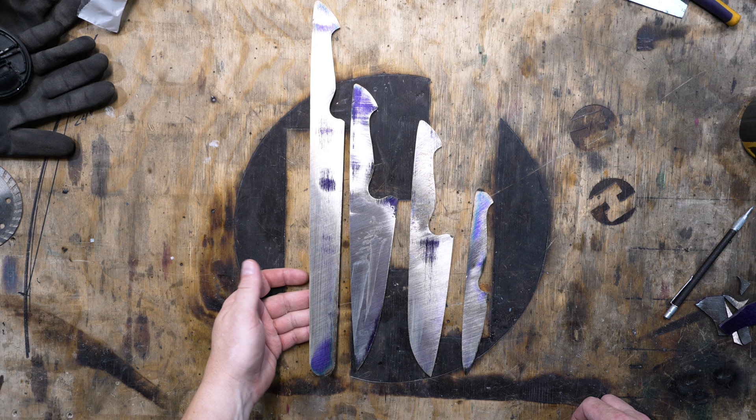So, next step is to clean these up a little bit and drill some holes and start the heat treat process. So this video is going to be mostly about the heat treating of the 1084 15N20 Damascus. Now, there's lots of ways to do this. If you look online, it could be a little overwhelming because everybody's got a different temperature they heat treat at. Everybody's got a different normalization process.

What I do, because I know where I got the steel and they have their own normalization process and hardening process, I just go off of their directions. This is New Jersey Steel Baron 1084 and 15N20, so I'm going to heat treat as though the whole thing's just 1084.

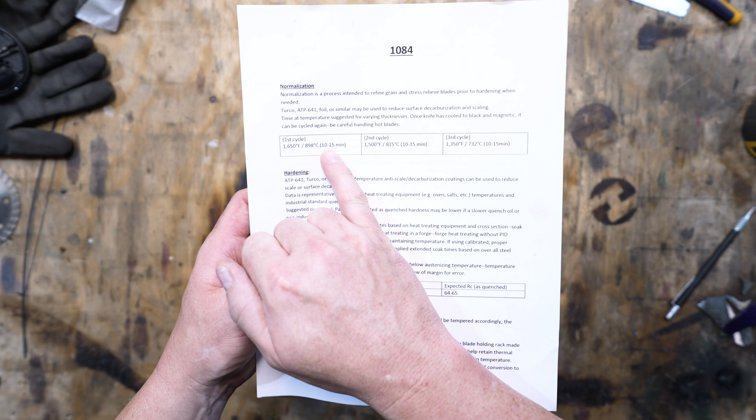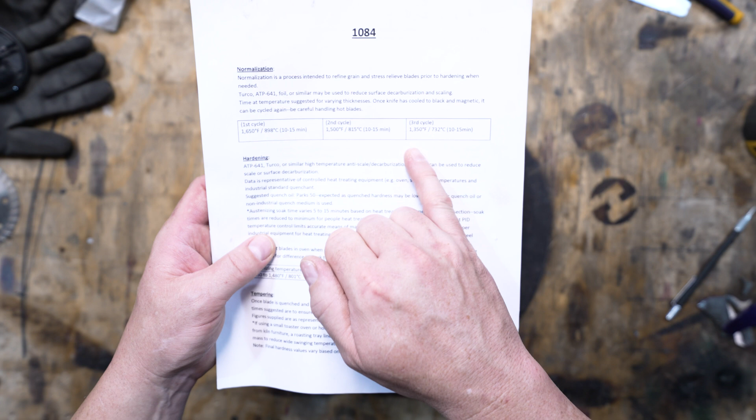So on here you can see they've got a normalization temperature and a length, a soak cycle. So the first cycle 1650 for 10 to 15 minutes, second cycle 1500 for 10 to 15 minutes, and the third cycle is 1350 for 10 to 15 minutes. So that's what I do.

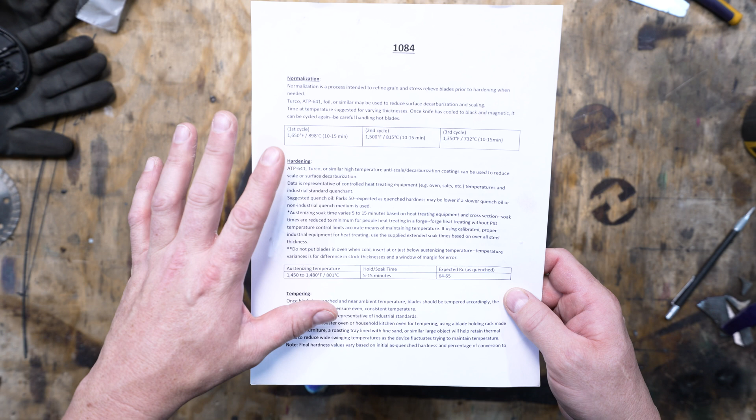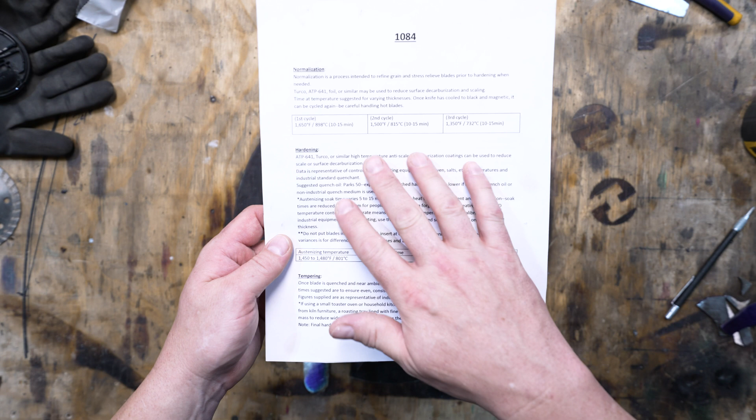When I got my kiln, it actually had some presets for 1084 or 1085 it says, and their temperatures are different. So I just err on the side of caution, and to determine which heat treat process is best out of all the things you can read online, I just go with the manufacturer's recommendations.

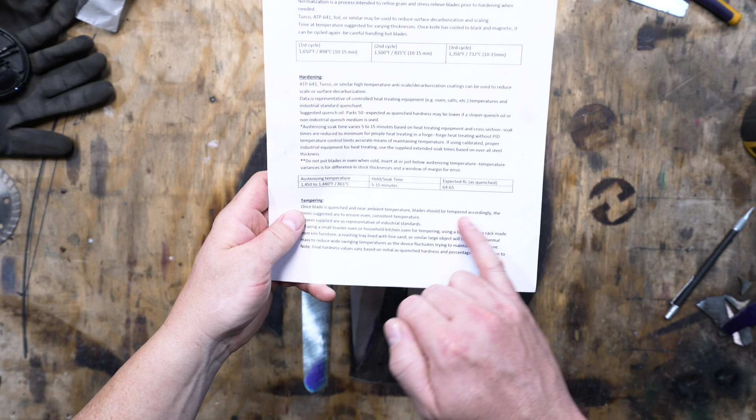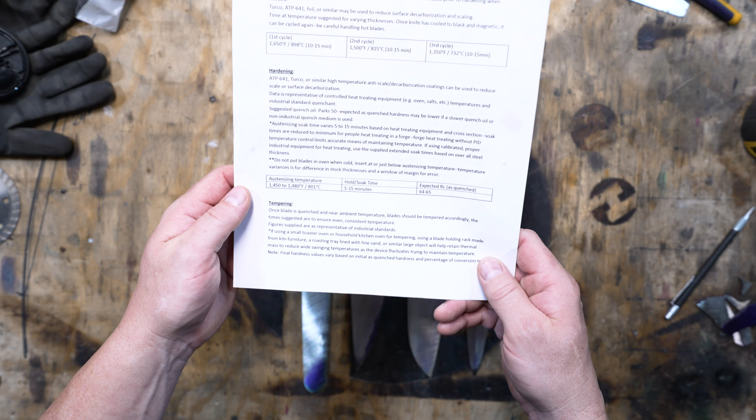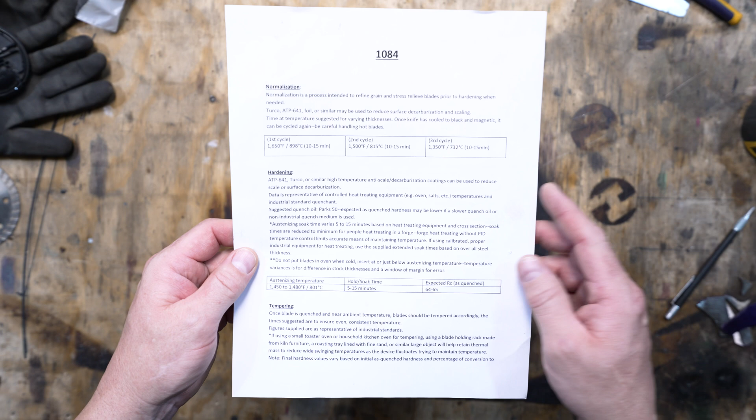And then down here they've got the hardening temperatures, 1450 to 1480, 5 to 15 minute soak, and it'll tell you what your expected Rockwell hardness is going to be. And then it also has directions for the soak time and just different things to read through, tempering, all that stuff. So on the New Jersey Steel Baron site, you can get this. It's just a download, and I printed it out, so I've always got it out here. But I just go by these directions.

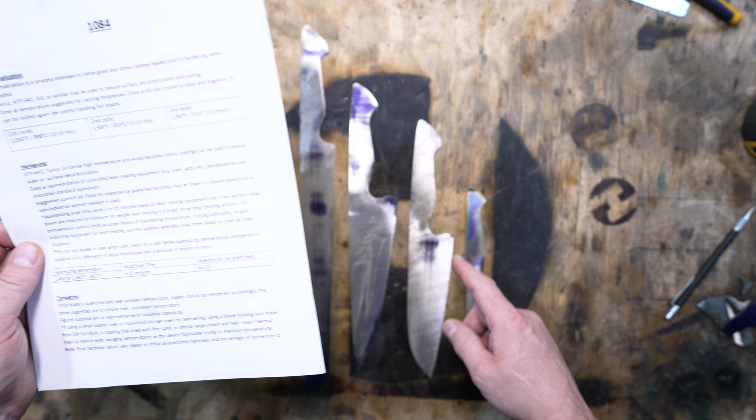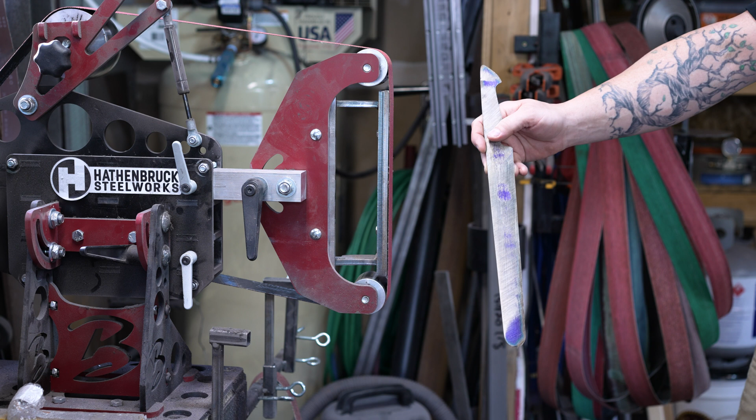So I'm going to get on the grinder and start cleaning these up a bit and rough in some bevels and then drill the holes, and we'll get to the heat treating. I'm going to have my mask on, so I'm going to do all the talking really quick. So I've got 80 grit. Essentially what I'm doing is I'm just going to get all these 80 grit marks out from the surface grinding, and when I do that, I grind at an angle.

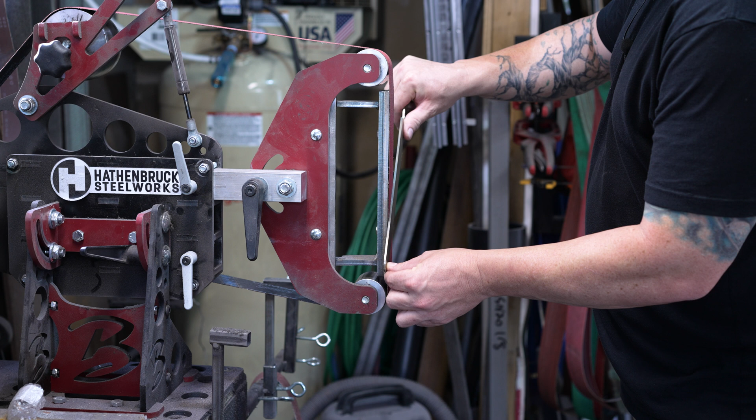This does two things. It gives me an effective, larger length of a platen. So for instance, 2 inches this way, but if I angle it like this, I've got almost a 3-inch platen. So it's easier to get a nice straight line when you angle. And then the other reason is my angle marks will be different than the marks going this way, so I can tell when I've got them all out.

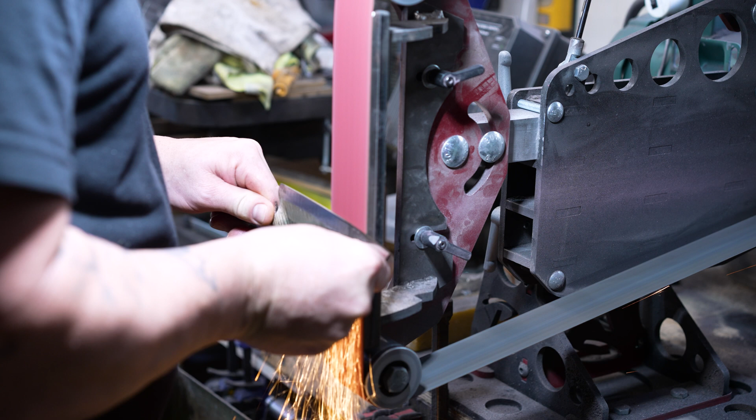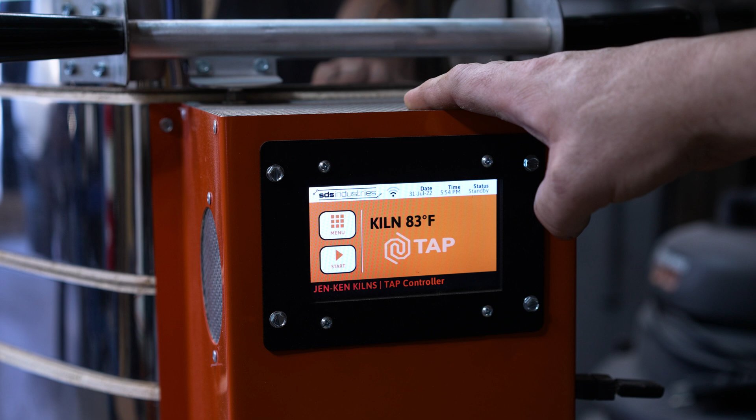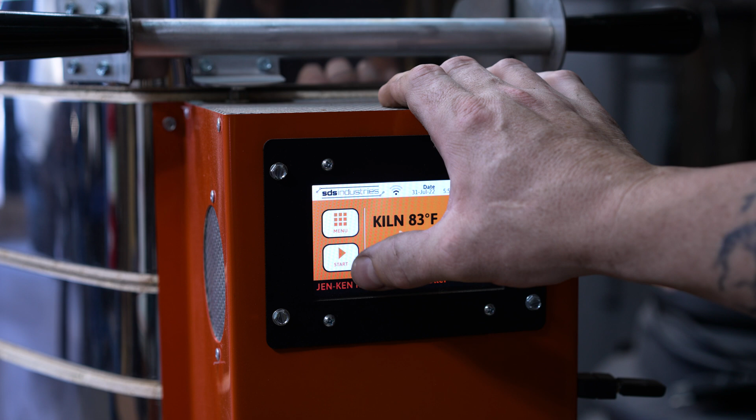So let's get the kiln going. So our first heat is going to be our first normalizing heat. Since this material has gone through a lot of change, we want to reset the structure inside of the steel, the grain structure. So we're going to normalize.

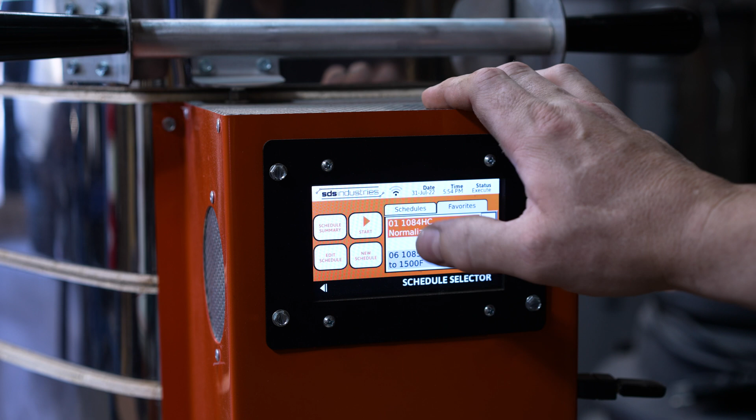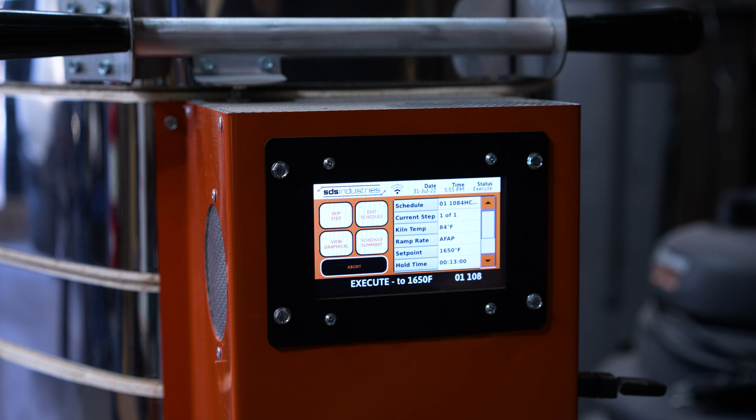Go to my favorites here and look for my 1084 cycle. There it is, 1084 1650 is going to be the first cycle. So we're going to start this up with no delay, and we just have to wait for this to heat up to about 1500 or so, and then we'll pop the blades in there, let it get up to 1650, and then we'll soak them about 5-10 minutes and then let them cool down to black.

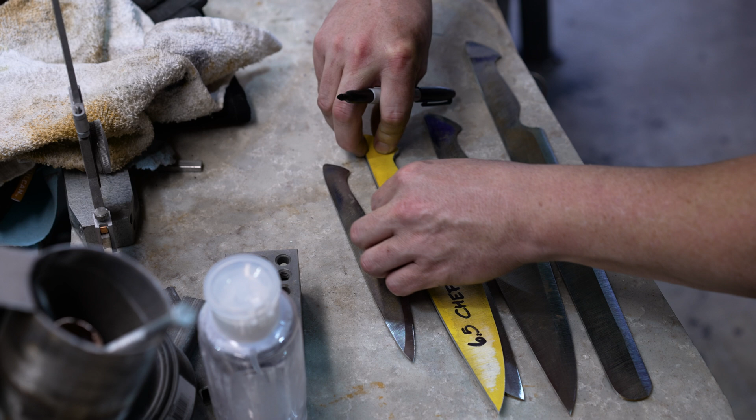All right, we got to put some holes in these tangs before we start the heat treat. So I'm going to use my template here, and then make a little mark right in the middle. And again, I'm using the template because this is a set and I want all these handles to look very similar, if not exact. And I'll put a little punch in all these to give the drill bit a place to start.

Give these guys a little chamfer. Because my kiln is a vertical kiln, they hang, so I have to drill an extra little hole that's about 1/8 of an inch so I can put my pins in it to hang them.

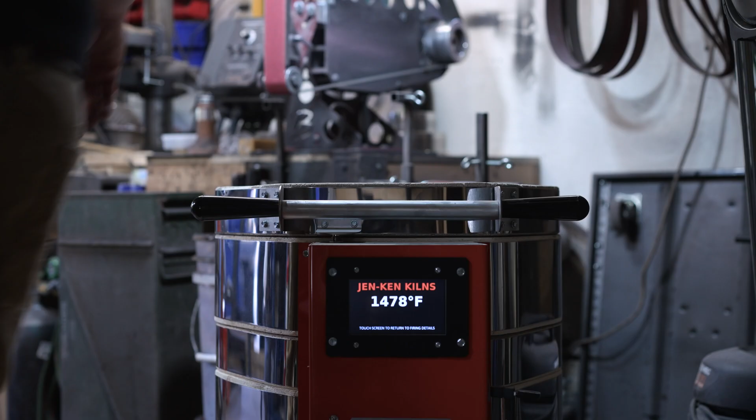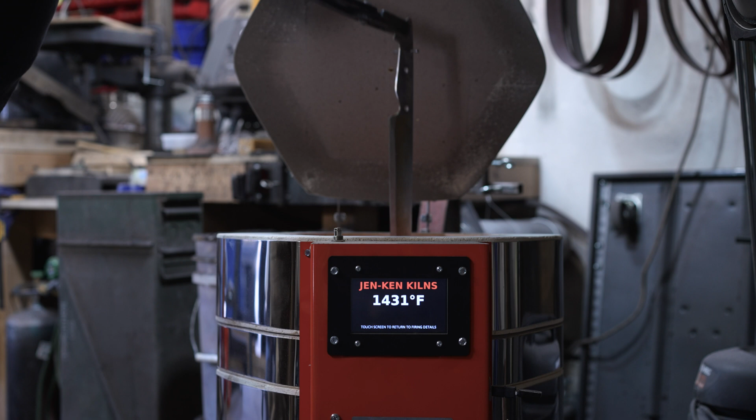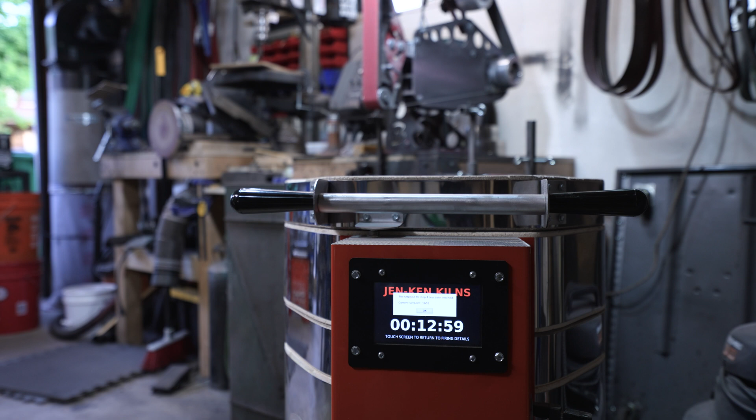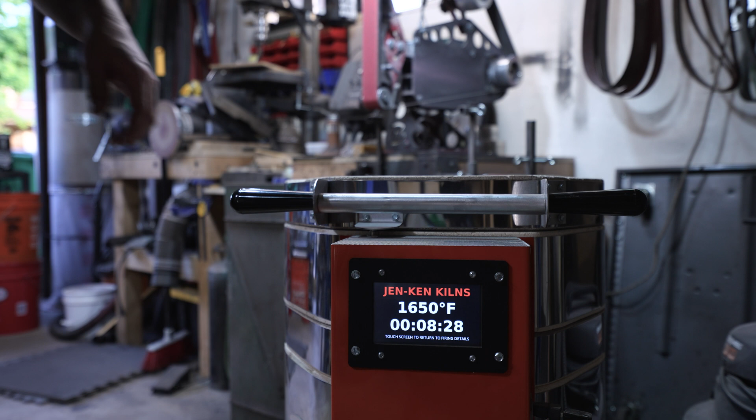All right, we're pretty close to 1500, so I'm just gonna pop these in here. And we'll let this guy heat up to 1650 so these can soak for just a bit, and then we'll hang them on the rack till they cool to black. And 1650. Turn that off. All right, let's get these out of here. Let this kiln cool back down so we can do the 1500 degree.

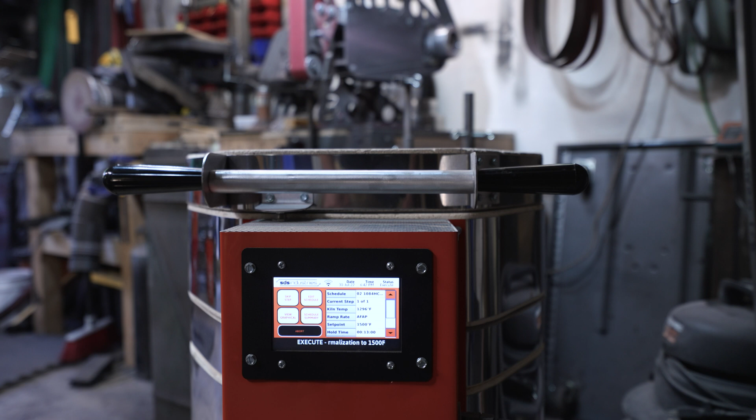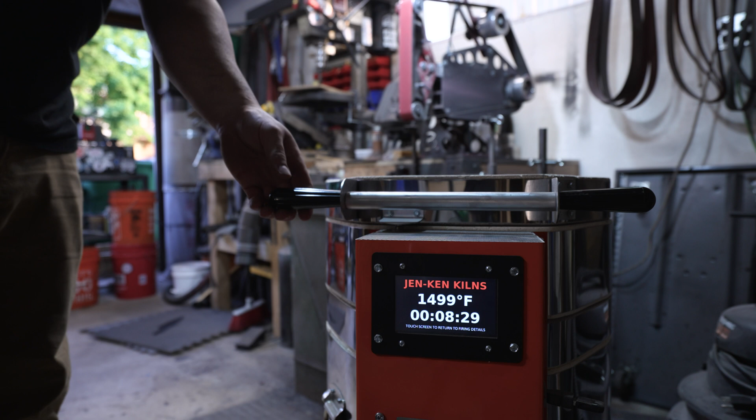All right, we're doing the next step, and this one is 1500 degrees. The blades cooled to black, so I slapped them back in here. We're at 1300 degrees right now, so a couple hundred more degrees soak, and then we'll let them cool again. All right, here we are, 1500. Let's get these on the rack. See if I can do this without dropping one this time.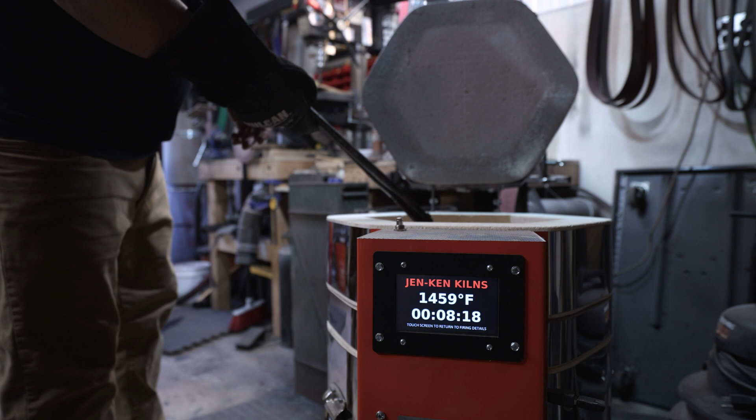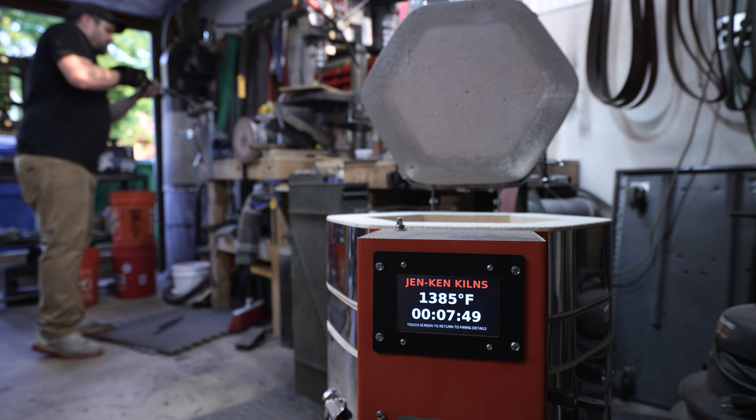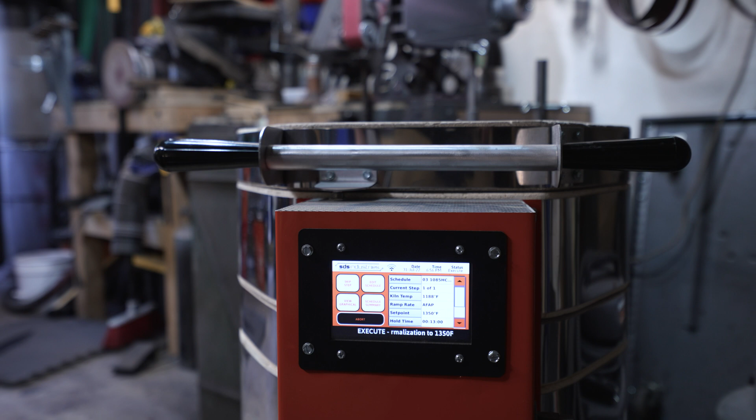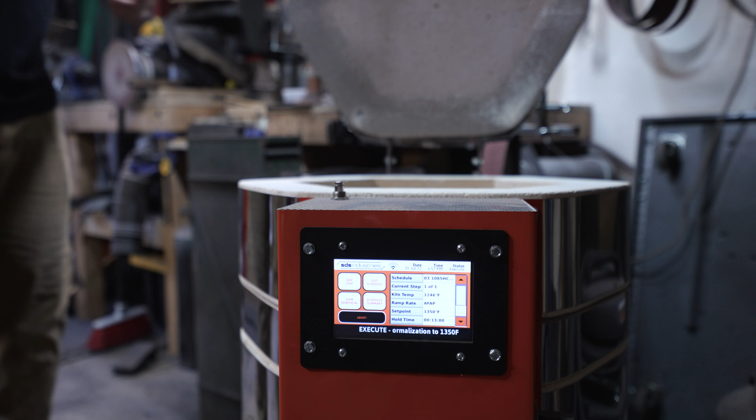Okay, let them cool to black. Let's get the 1350 cycle started. And these knives are at black, so we can put these in here as soon as we get close to 1350. All right, let's get these knives put back in here. There we go.

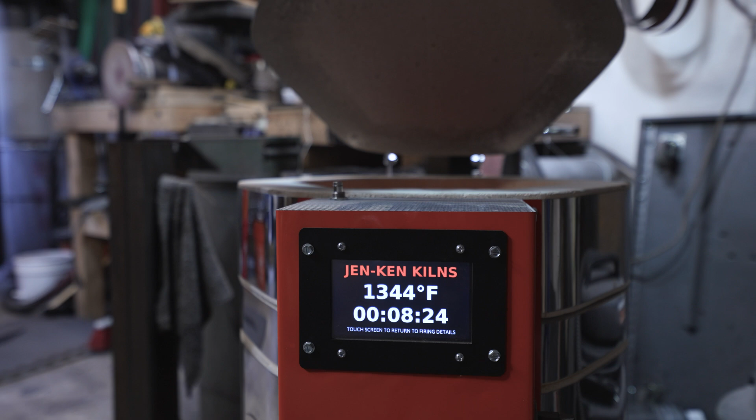Okay, over in the forge, I've got a piece of steel heating up so I can heat up my oil to about 120 degrees. And right now we should be able to pull these out and let them cool to black. This is the last normalizing cycle. So once these have cooled a little bit, we can start the hardening process.

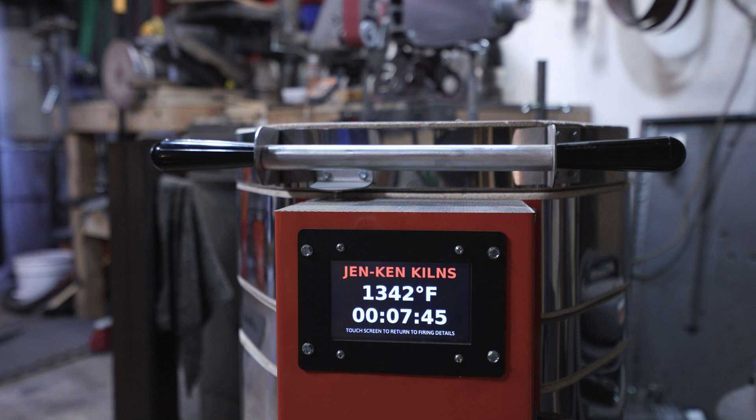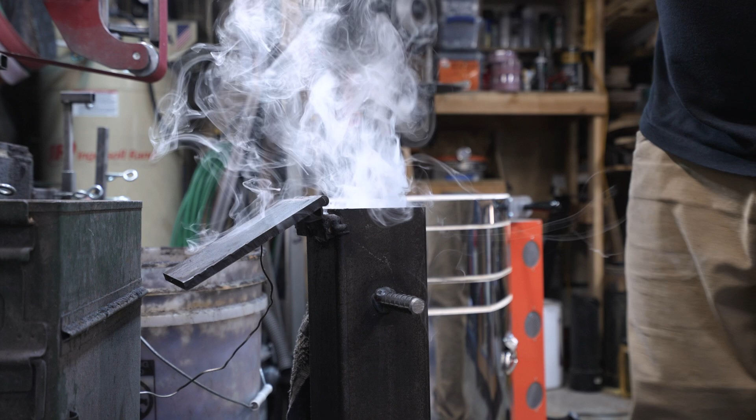All right. So I'm going to cancel this and let this thing start to cool just a little bit. Put this in the oil to heat it up a bit. I got a thermometer in there so I can keep track of the temperature. That took us up to about 130 degrees, which is going to be perfect.

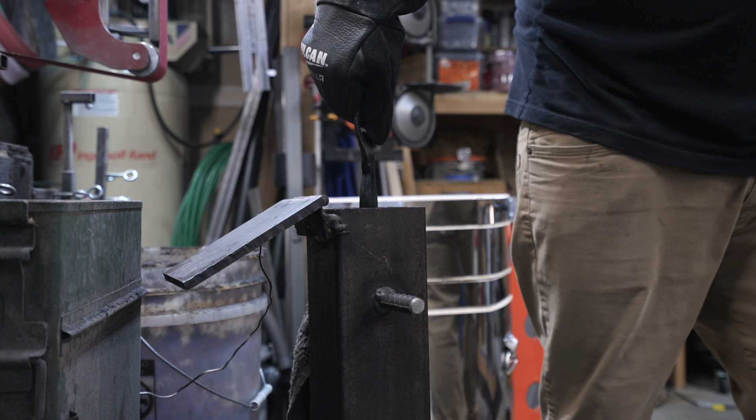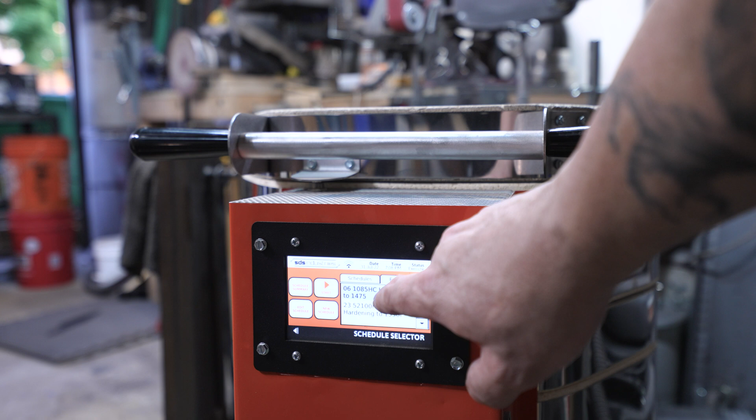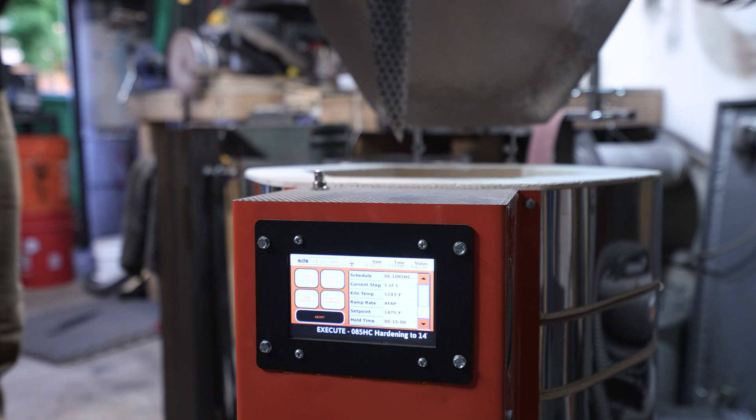Now let's get our hardening temperature ready to go. Let's see, 1084, 1475. That's what we're going to go with. So let's get that started. Our temp's at 1232, so we're just going to put these blades in here now. There's the paring knife and the brisket, chef knife, which still has a pattern from it falling on my floor mat. And then the Santoku.

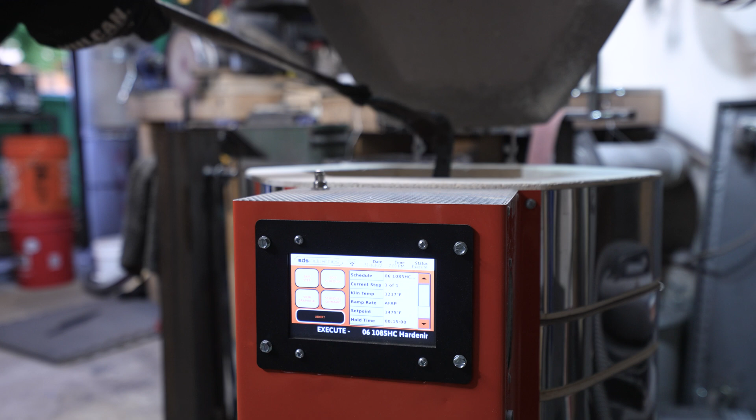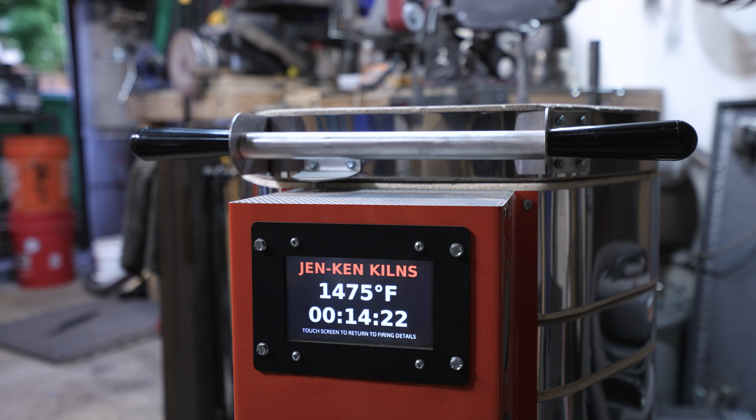Okay, so 1475, about a 10-minute soak, and then we'll dunk them in the oil. And here we are, ready for a soak. 5 or 10 minutes is all it should take. 1084 is very forgiving when it comes to soaking, because this stuff, really, you don't need to soak it. As soon as you're up to your temperature, it's pretty much good to go. Some steels do require a soak, so just make sure you're doing what the manufacturer recommends on your temperatures and soaks. Here goes knife number one. We'll start with the paring knife.

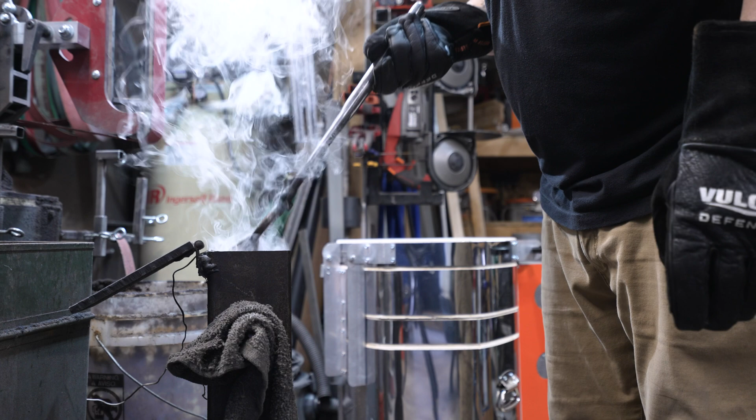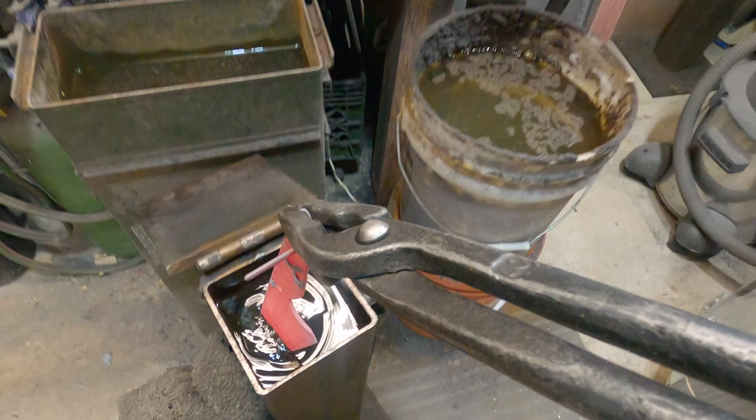And this one, I'm not too worried about bowing because it's pretty small, so we're good there. See that nice pattern in there. Here we go with knife number 2, which is going to be the chef knife. This one, I am concerned about bowing.

And it bowed a little bit. See if we can straighten that out a hair. Oops, a little too much there. All right, let's put that on the rack and see if it'll stay straight.

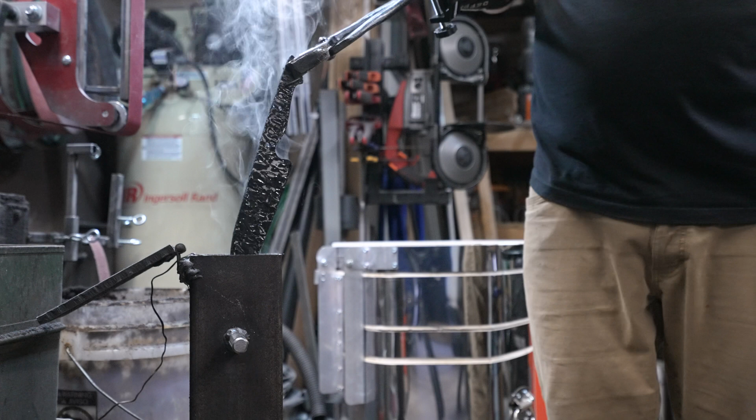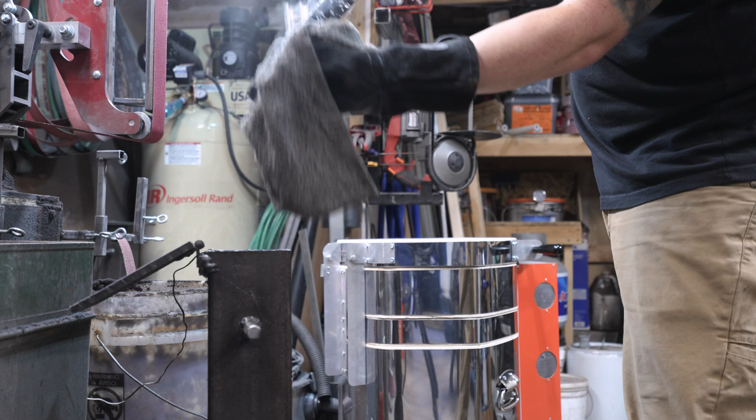And the last knife is the brisket, which I'm almost certain is going to warp, but fingers crossed. Let's see what we got here. That doesn't look too bad, actually. I thought there was going to be a lot more warp than that, but I think we kind of lucked out here. Just a little bit up front, a little bit right there, and oh, that is good now. So we'll let this hang and we'll check it periodically.

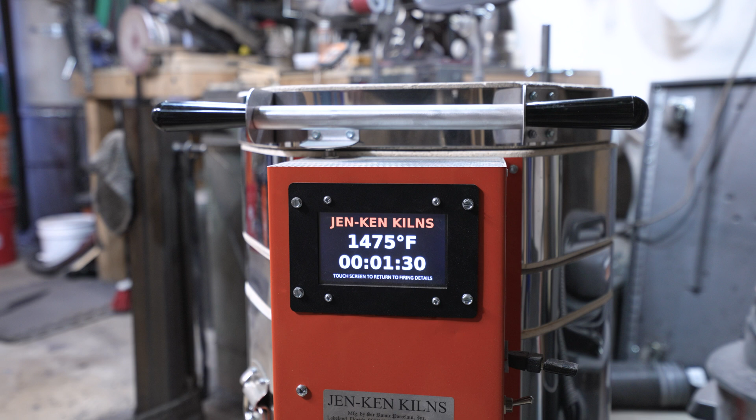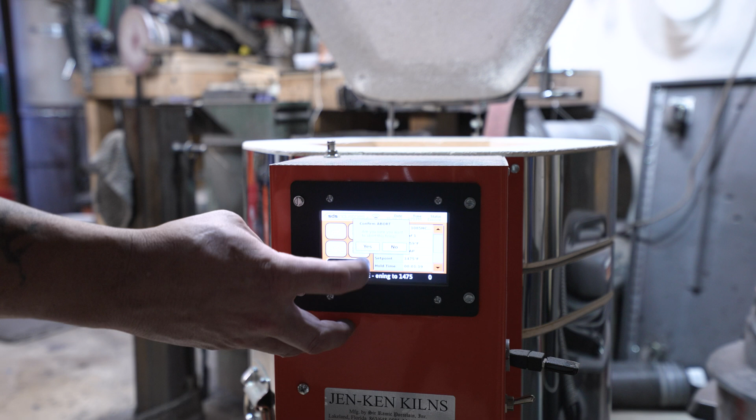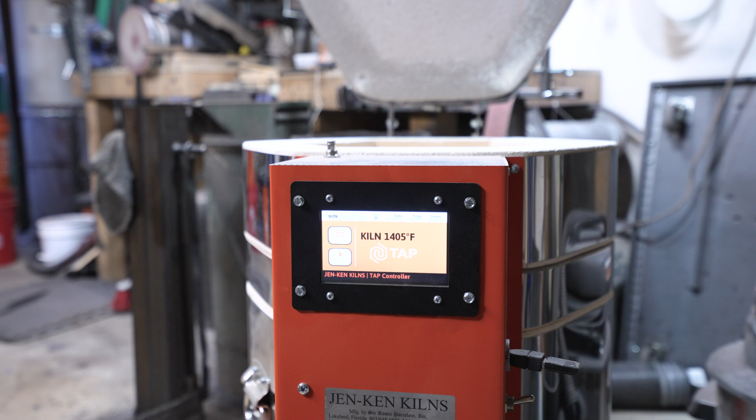And then back over at the kiln, I'm going to use this to do the tempering. This thing retains heat really well. So we need to open this up and cancel the cycle, and then just let the heat escape. It's probably going to take 30-45 minutes for this to get down cool enough to do the temper. So in the meantime, I'll watch these knives, make sure they don't warp while they're cooling. And then we'll come back here and slap them in this for the exciting part, the tempering.

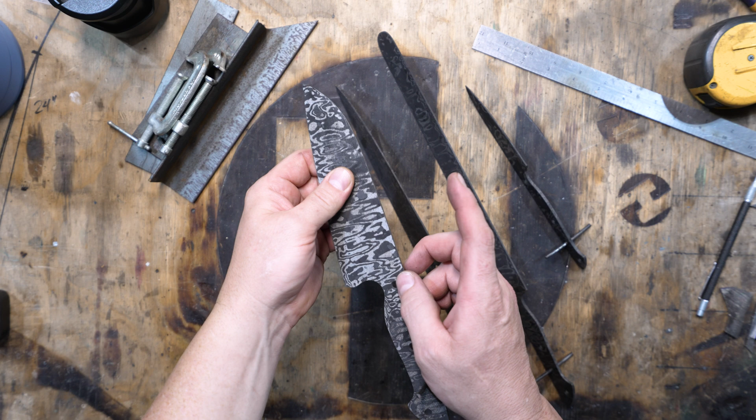While I'm waiting for my kiln to cool down, I'm going to show you what I intend to do. So the Santoku and the brisket knife both have a little bit of a warp right up toward the front here that I couldn't quite get out. And this one, it's not bad. I could probably get it out with the grinding, but I'll just get it out in the temper. So what I'll do is I'll run one cycle at 350 degrees to get these things softened up a little bit, and then I'll put these both in a little jig that I have.

And what I do is I put a piece of metal like this, and then I figure out where the warp starts, and then I'll clamp this down here, and then I'll put another clamp past where the warp is to pull the warp past straight to the other side, and that way when it tempers it'll pull that warp out either a little past straight or right at straight, and then the warp will be gone and grinding will be easier.

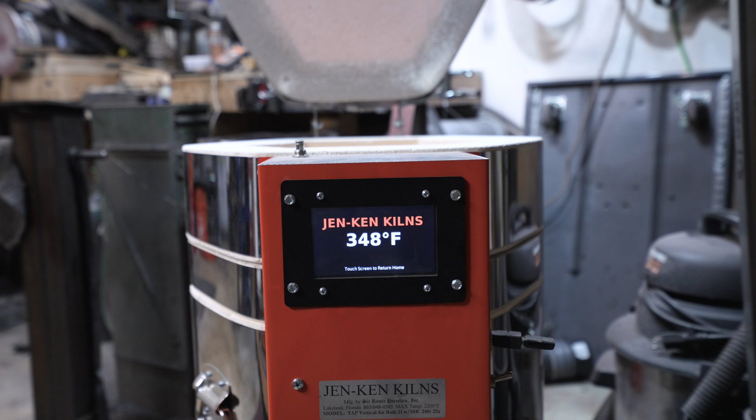So I'll put this on here, this one on this side, and then I'll clamp them both and then pull the warp to the opposite side on each of them. And most of the time that pulls the warp out, and then they end up perfectly straight. So this thing's cooled down to the point that we can probably start the temper cycle.

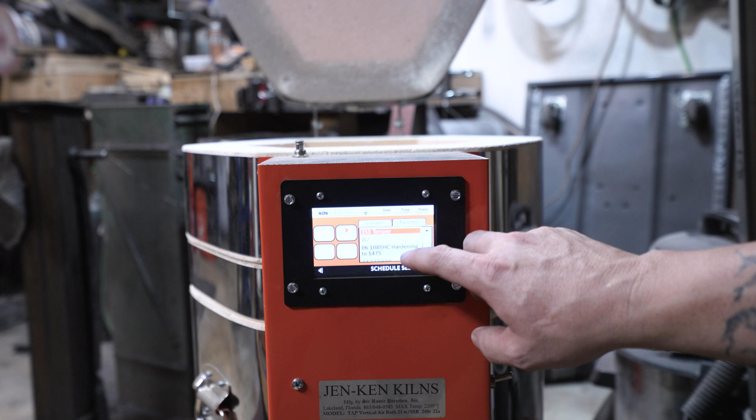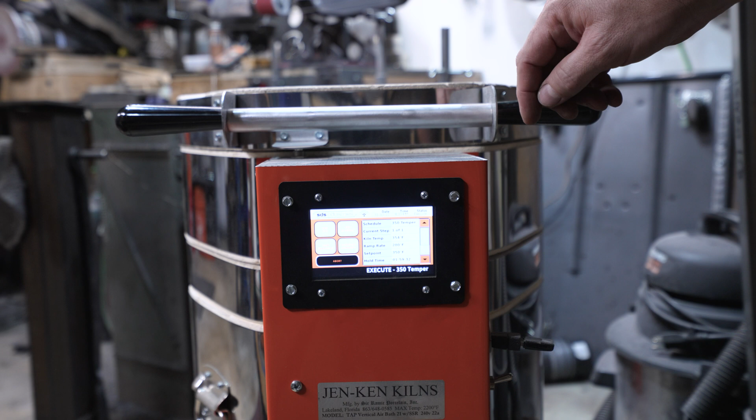So I have a few different temper schedules on here, and have this, where is it, 350 right here. So I have a 350 temper cycle, and what I like to do for the first little bit on this is kind of sit here and watch the temperature, because this is a schedule that I did, so my ramp speed and all that stuff should probably be adjusted to the point that it works a little better. But once the steel and the internal temperature of the kiln become equalized, then I can leave it alone.

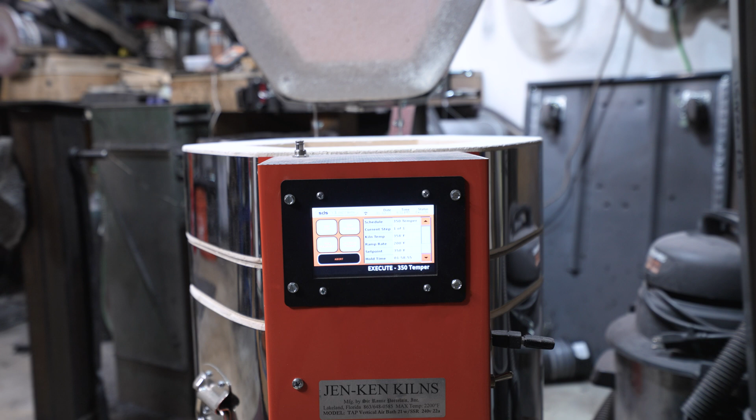But you can see right now that it's hopping up to 357 degrees. So I'll open this back up and let some of the heat out so it'll drop back down. So what I want to do is get it to where it sticks at about between 350 and 355, and then I can just let it go. I don't have to worry about it anymore. But most likely I just haven't set the schedule up correctly. The ramp speed's probably off something, but I'll get it figured out in the future. But for now, I just kind of watch this for the first little bit until everything equalizes.

The first temper cycle is done. Now I need to address the warps in these two knives, and they're really straight except for right up here toward the front, and they have like a nice little bow in them, just a little too much to grind out. So what I do is I'm going to take this, so this one's bowing this direction, so I'm going to lay this on a flat surface and look at it from the side, and wherever I see this start to lift up off of the flat surface, I'm going to mark it. That way I know to put the mark even with my piece that's going to raise it up, so I can bow this in.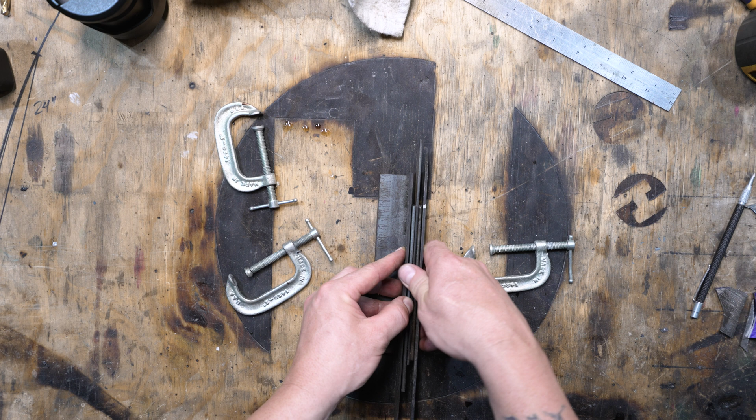So this one starts bowing right here at this mark, and this one starts bowing right here at this mark. So I'm going to take my piece of angle iron right here, and I'm going to put this right here even with this mark. And then what I want to do is place it on this piece of angle iron like so. And when you do two of these, it gets a little tricky. So I kind of want to put these in the same spot. And then this one's also bowing this way, so I want to actually put this about where it's going to be and then flip it this way, like that. Now, I just need to lock these down in place.

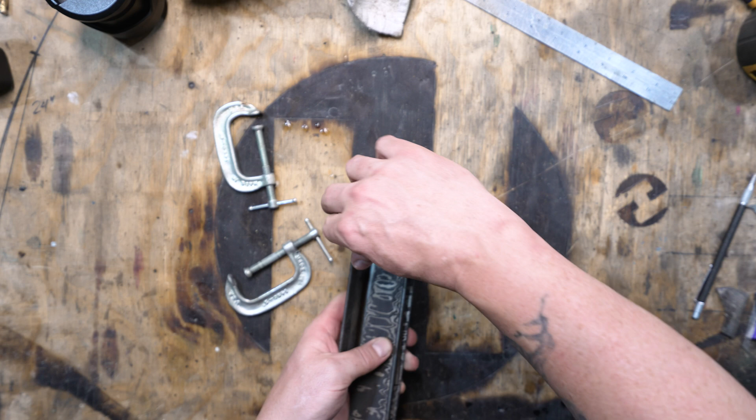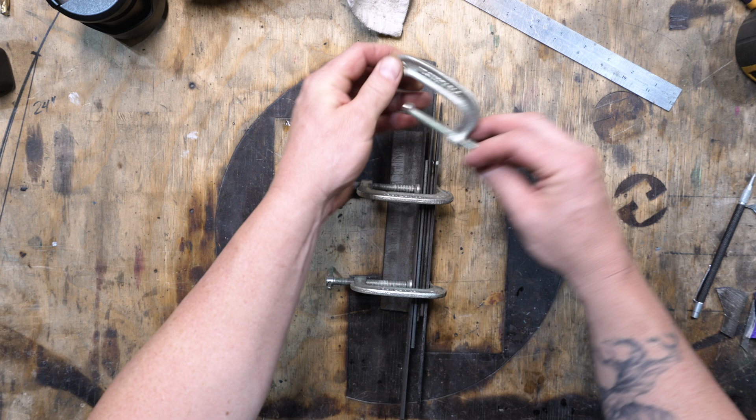Like this. And then clamp another one up here, just so I can keep these flat. So they're going to be flat up until here, and then they kind of bow out like that. So then when I get up to here, I just pop another one of these up here like this, kind of go toward the center of the blade, and then just crank this down until these bow this way past center. And if you leave enough space in between here to look down, you can see when those are bowing enough past.

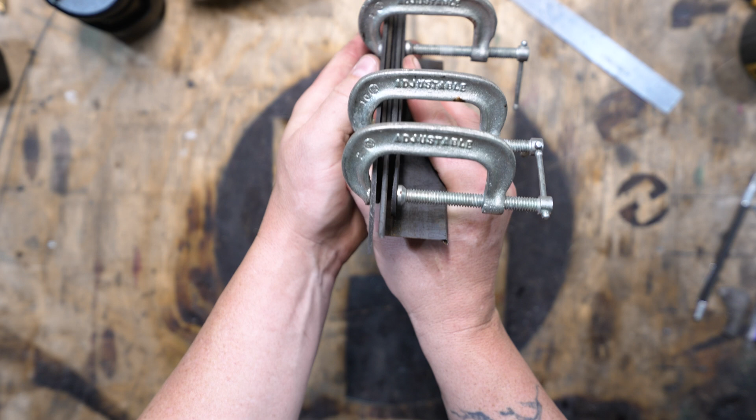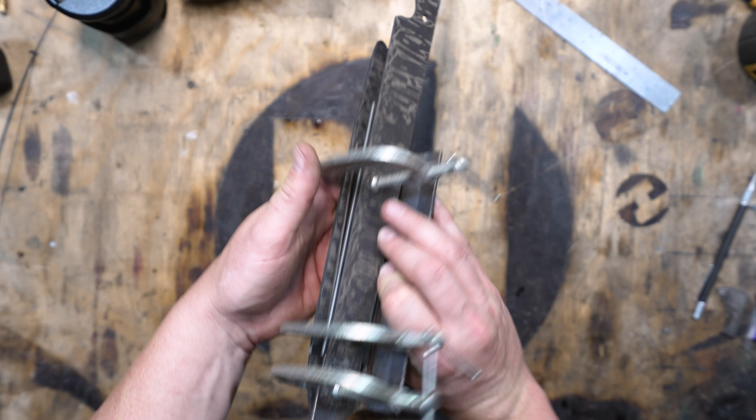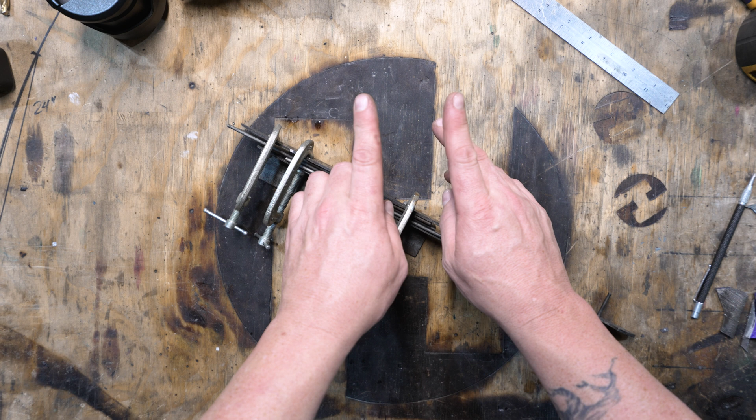So yeah, I've got those bowing pretty good. I'm going to move this one up closer to that line, just to keep the bow more toward the front instead of bowing out past here. And then that is about where I want it. So now I'm just going to take this whole contraption and put it back in the heat treat oven and temper one more cycle. And then once I cool these, they should spring back a little bit, but not back as far as they were. So it'll straighten out that bow just a little bit.

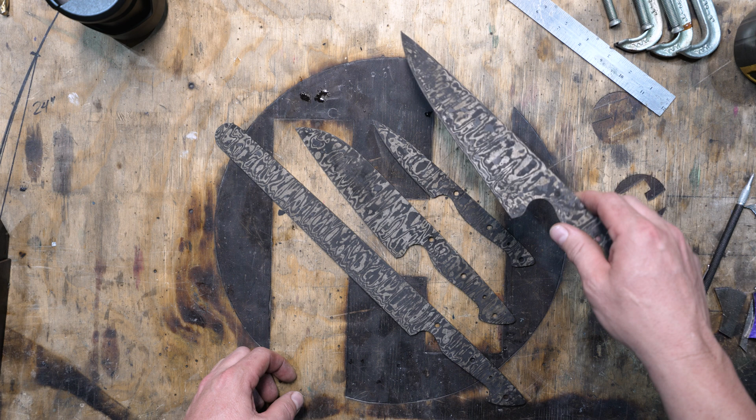So here are the knives. In case I forgot to tell you, my temper cycle for my cutlery is 2 cycles at 2 hours and 350 degrees. That usually makes for a nice hardness for this cutlery. So the 2 that were warped, the Santoku, the warp came out almost all the way, but well enough in grinding range. So that's going to be good. And then the brisket knife, the warp came all the way out. So we've got 4 perfectly heat treated knives. That's going to be it for these as far as heat treat goes.

So from here, it's just getting my bevels in, my edge thickness correct, and from there it's hand sanding and handle and finish work and all that good stuff. So a couple more videos and we'll be done with this series.